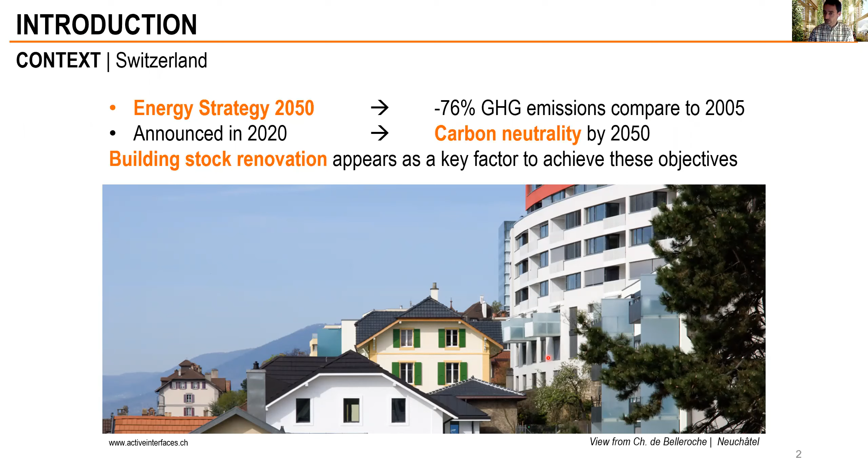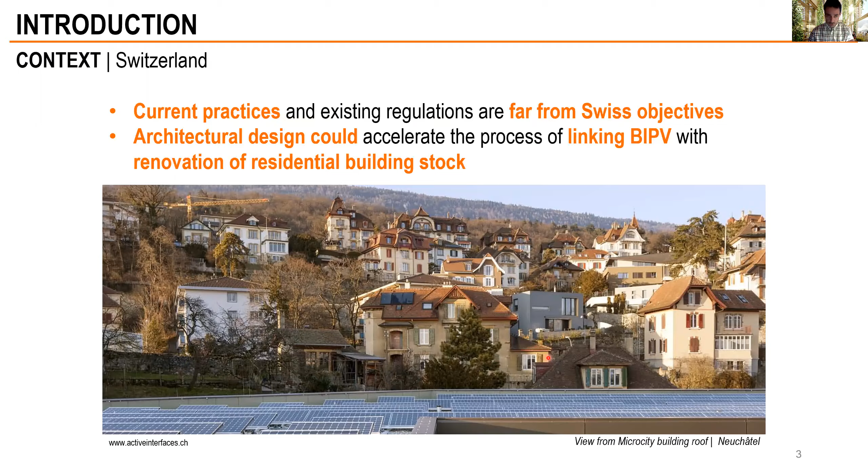In order to achieve these objectives, the renovation of the building stock appears as a key factor. We know that current practice and existing regulations are far from Swiss objectives, so we need to go further, and we think that architectural design could accelerate the process of linking BIPV, so producing electricity on site, with renovation of the residential building stock. A new challenge appears to architects and engineers.

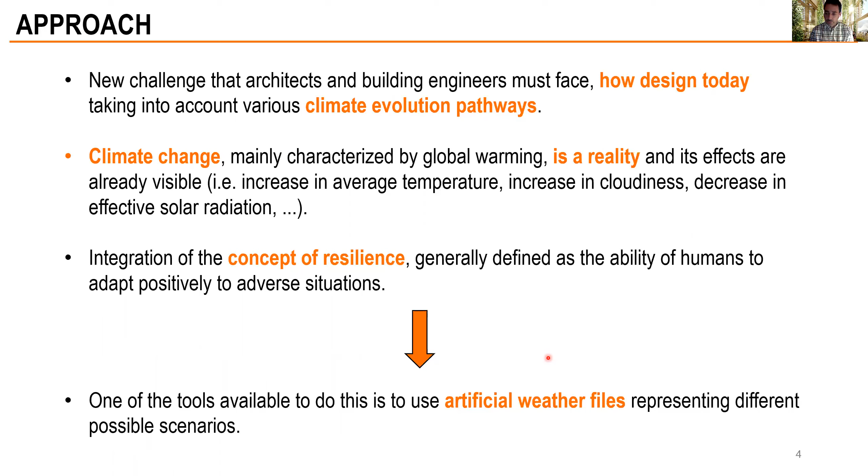The question is how to design today, taking into account various climate evolution pathways. We know that climate change, mainly characterized by global warming, is a reality, and its effects are already visible: increase in average temperature, increase in cloudiness, decrease in effective solar radiation, etc. So we need to integrate the concept of resilience. Resilience is generally defined as the ability of humans to adapt positively to adverse situations. In terms of building design, we can use artificial weather files that represent different possible scenarios to conduct our building performance simulation.

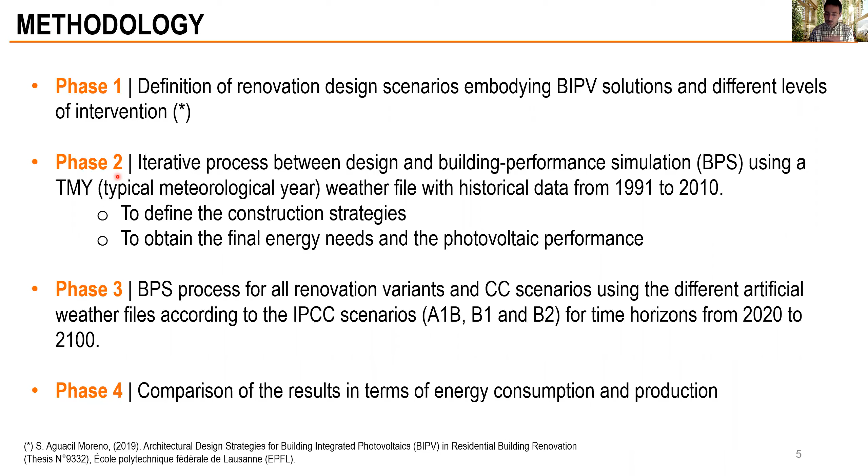The methodology that we use consists of 4 phases. The first one is to define the renovation design scenarios, taking into account BIPV solutions. In phase 2, we make an iterative process between design and simulation, using the typical meteorological year weather file, TMY, with historical data, to define construction strategies, insulation thickness, etc., to obtain the final energy needs and photovoltaic performance. Phase 3 consists in simulating these scenarios using the different climate change scenarios, with artificial weather files generated in this case using Meteonorm. And in phase 4, we compare the results and draw some conclusions.

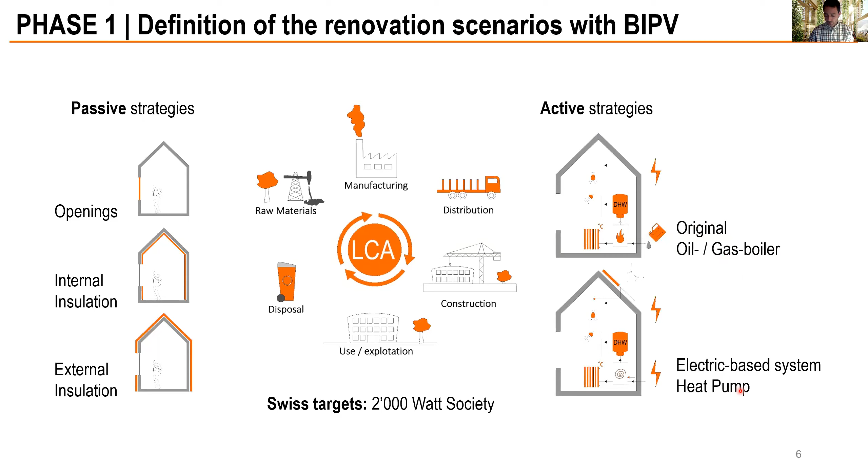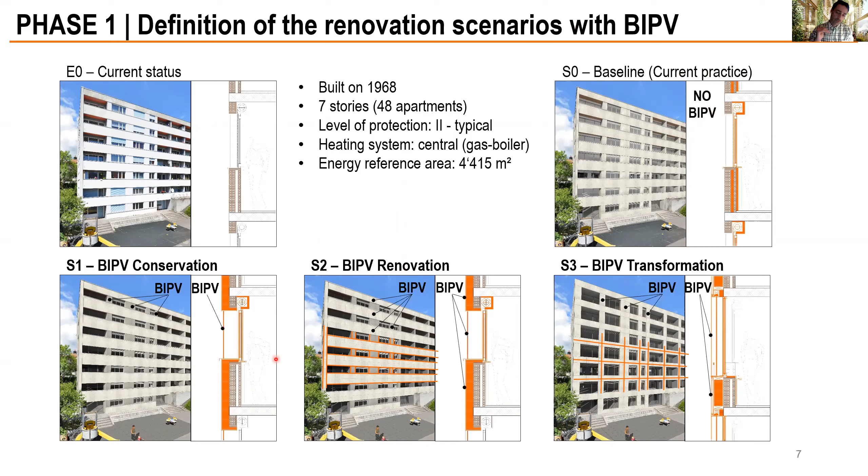Phase 1 really quickly consists in defining strategies: passive strategies, replacing windows, increasing insulation, but also active ones, for example, replacing the oil or gas boiler with an electric based system with a heat pump. This is the case study that we use. It's a case study from 68 with 7 stories. Here you can see the current status of the building with a section of the main facade. This is a renovation scenario with indoor insulation, no BIPV, that represents current practice, just to achieve the minimal legal requirements. And these 3 scenarios integrate BIPV and try to achieve more energy performance.

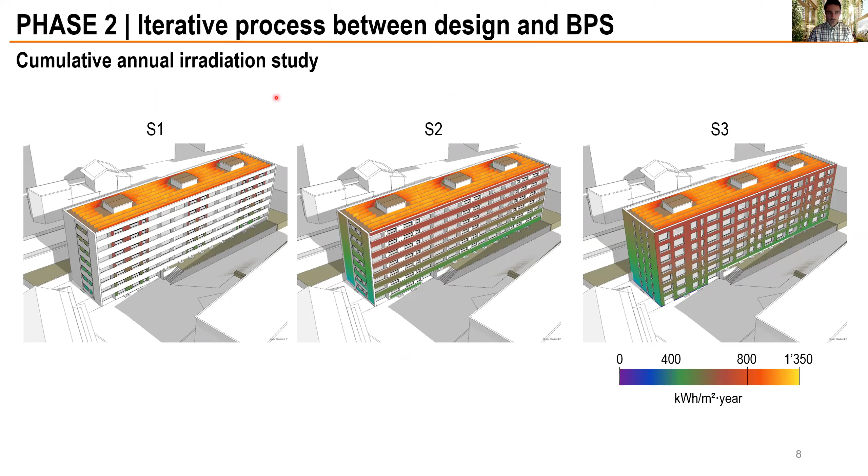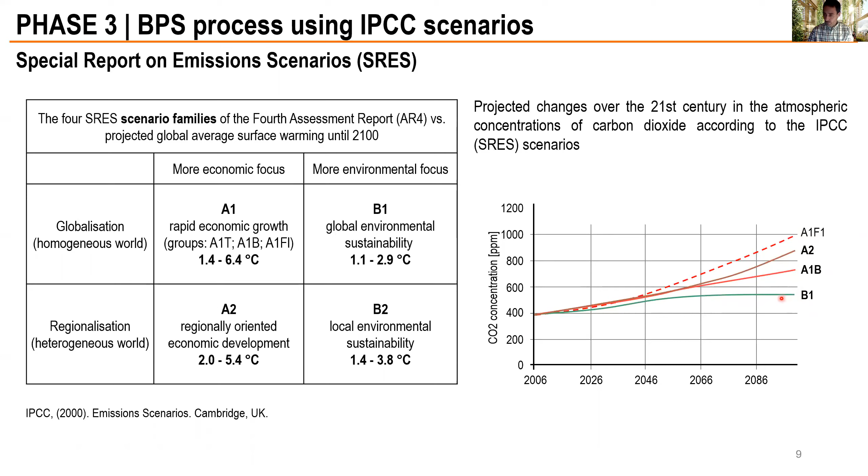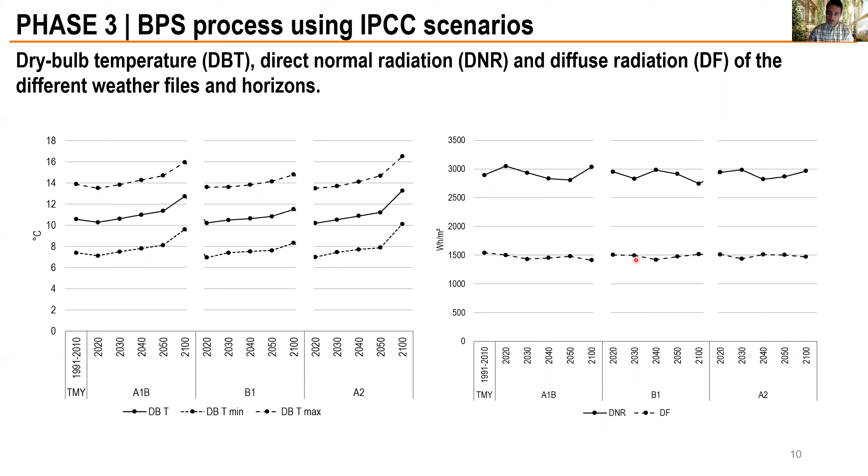This is an example just to say that we also use the roof, not only the facades, and we calculate the production hourly. These are the 3 climate change scenarios that we decided to use, representing the more optimistic and something in the middle. This left graph shows the temperature for the different climate change scenarios and for different horizons compared to the TMY weather file. And here we can see the solar radiation.

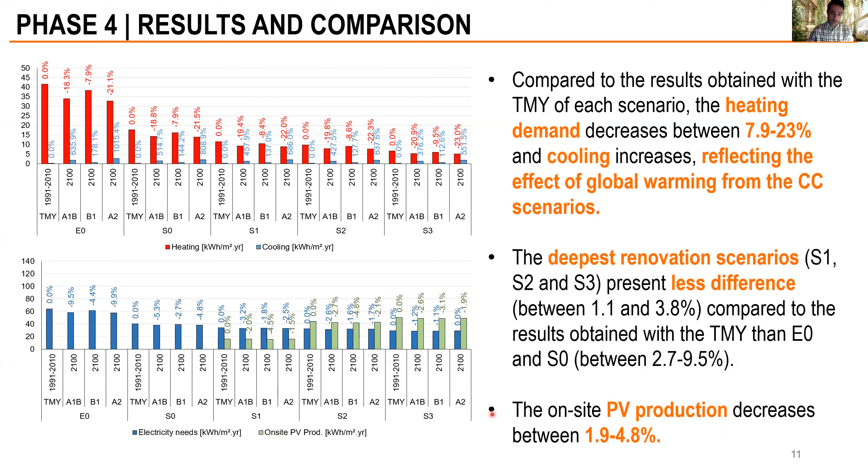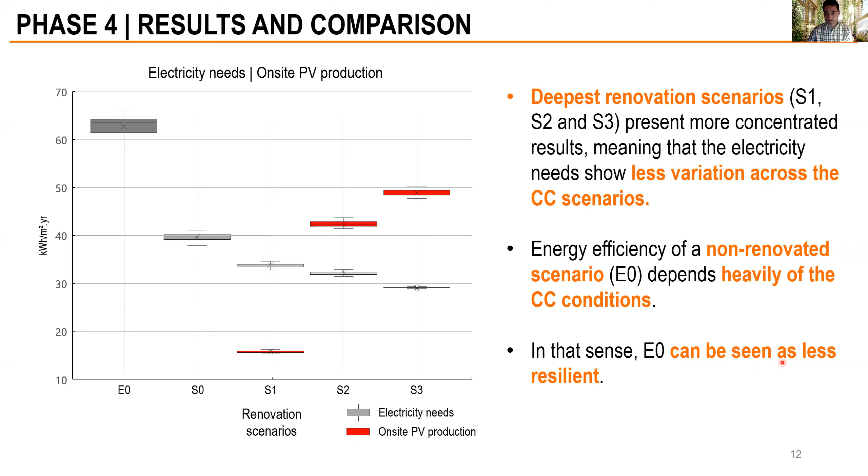Using box plots to see the difference between all the scenarios and variants that we simulated, we can see that the deepest renovation scenarios, S1, S2, S3, present more concentrated results compared to E0. So we have less variation across these climate change scenarios. The energy efficiency of the non-renovated scenario, E0, depends heavily on the climate change conditions, and in that sense, E0 can be seen as less resilient.

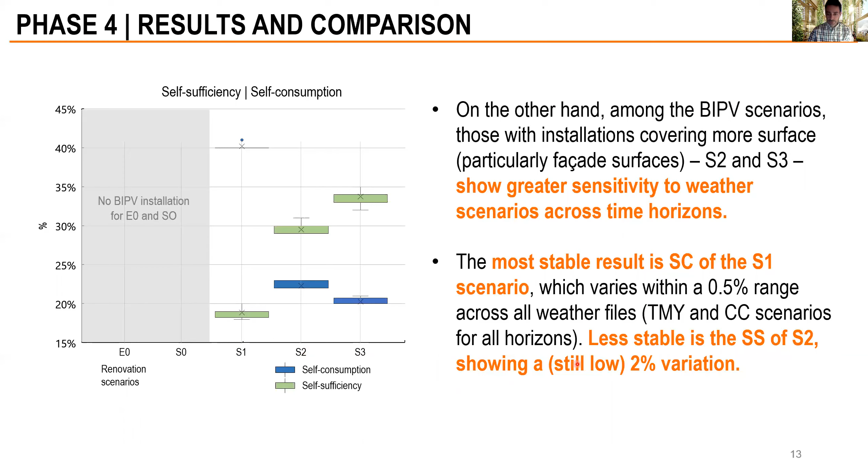In terms of self-sufficiency and self-consumption, S2 and S3, these two renovation scenarios including BIPV, show a greater sensitivity to weather scenarios across time horizons. But the difference is not so high, and the least stable in terms of self-sufficiency is S2, but still low. It's just 2% of variation.

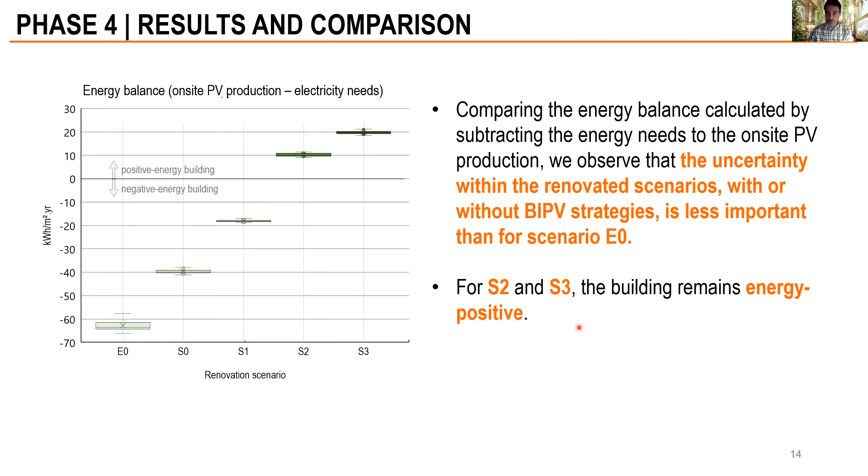In terms of energy balance, we can see that the uncertainty within the renovated scenarios, with or without PV strategies, is less important than E0. E0 is always more dependent on the climate change scenario. And for S2 and S3, as with the TMY weather file, the building remains energy positive.

So in general, despite the fact that the overall energy performance of the building varies, with changes in heating and cooling demand, results show that if the renovation strategy were developed based on future climate scenarios, the influence would be minimal. Indeed, tendencies show no contradiction with respect to the TMY results, on which the strategies designed in phase 1 of the methodology were based. The results also reiterate the importance of renovating the building stock by highlighting the important energy efficiency gains that can be achieved through various renovation strategies, some involving BIPV systems.